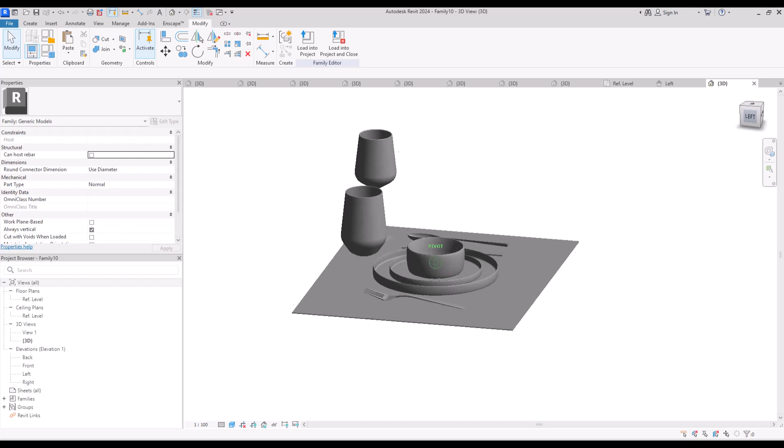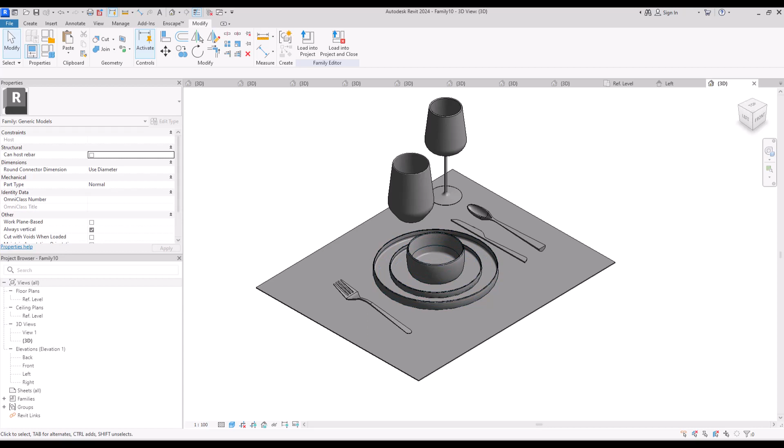I was working on a dining room and needed to set a table for render. I thought it's very simple, so I can share this with you. As I say for all our families, you can model this one time and use it in all your projects. Probably you can set a table like this with 8 or 10 dishes, and of course you can do more. So let's start with number 1.

Go to File and create a new family on Generic Model. First, set your unit, press UN and go to Length part. Change it to meters and put rounding on 2 decimal places. Go to Left View and select Revolve.

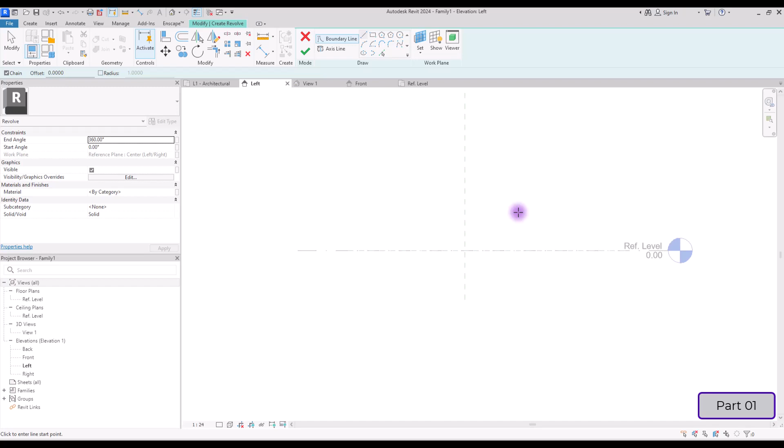In here we are going to model a dinner plate or service plate, which is the largest plate on a table, and it's something around 25 to 30 centimeters in diameter. So I'm going to draw a line here like 30 centimeters and move it to center, like here.

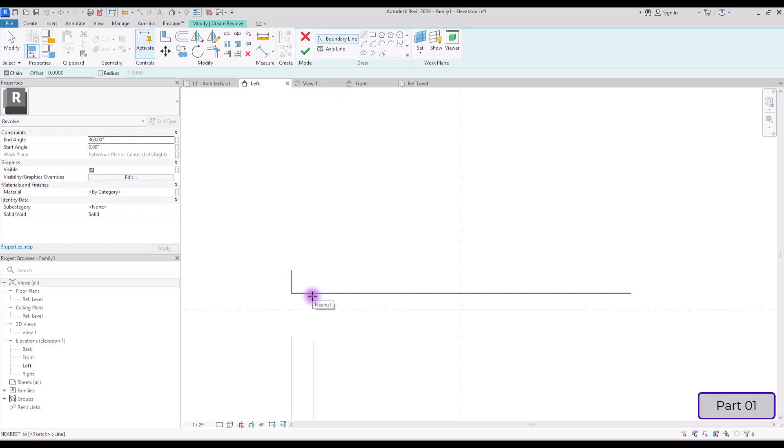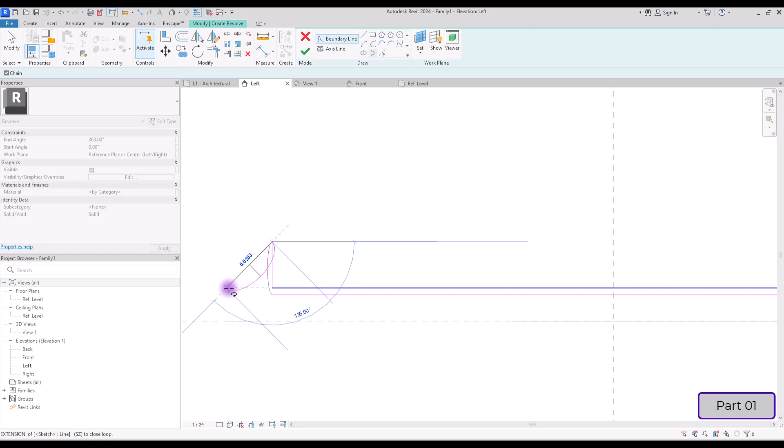I also wanted to have these kind of edges. These kinds of plates are trends these days, so I'm going to use something like this. I'll use a pick line to offset this line for like 3 millimeters to this part, and for attaching this part to here I'll use this partial ellipse, because it gives some kind of curves here. I think it looks good.

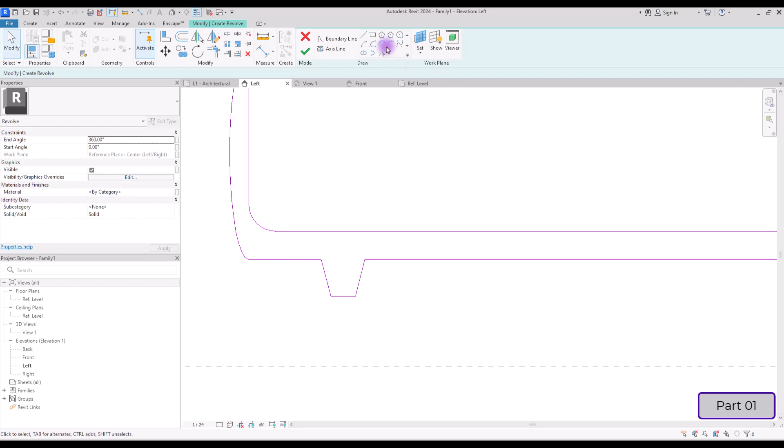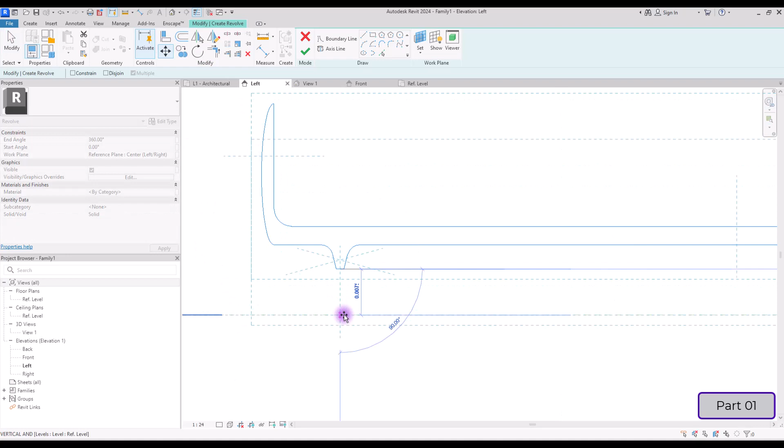Now I'm going to use fillet for this part, and also add some kind of edges to here, something like this, and trim these parts with these lines. I'll also add fillets to this part and this part. I'm going to create a line in this part and trim it with these 2 lines. Now I'll draw its axis to here and move all these lines to this point, to this line here.

Now if I hit finish and go to 3D view, you can see that our plate is ready. It was very simple, right? But let's also make it a bit interesting.

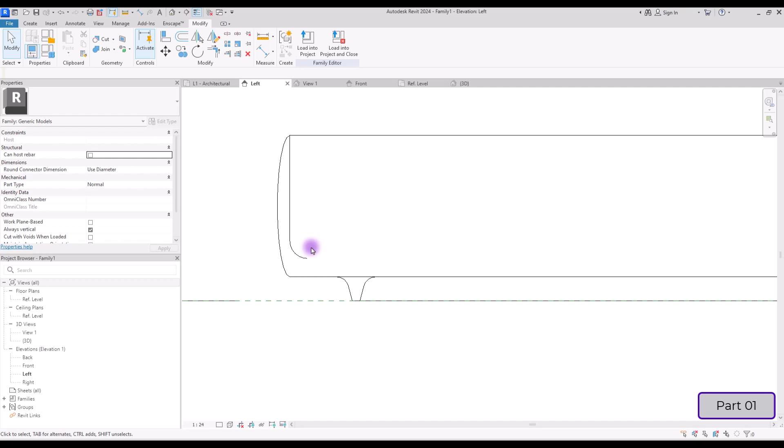I'm going to create another part exactly like this inside of this plate, so I can add another material to it. So go to create and select revolve again.

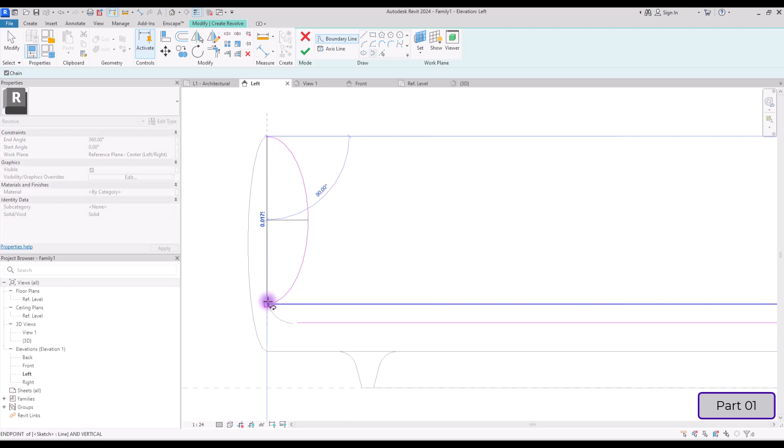Create another line exactly on here with a very small offset, like 2 or even 1 millimeter is enough. I'll move it to this part and use partial ellipse to create something very simple in this part. Now with this split element, I'm going to cut this here and add another line from this point to here.

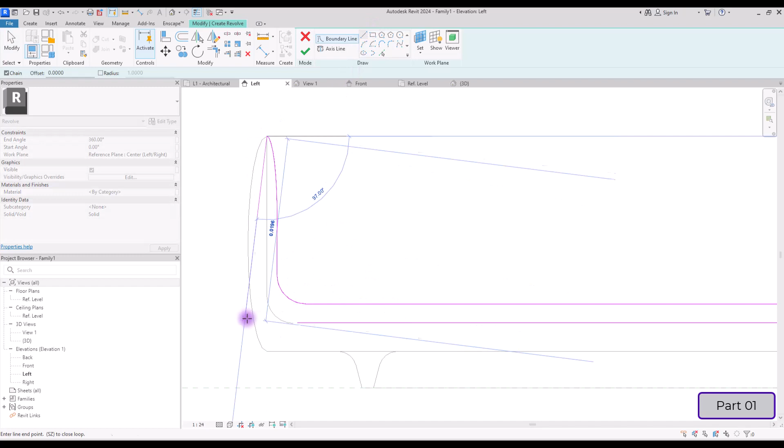Delete this part and trim these 2 parts together, then fillet this part. Draw a line in here and trim these 2 parts together. Don't forget to fillet it.

Actually, because we're not going to use a schedule or something like this, you don't need a very clean and on-edge model, so this is enough. Draw your axis and hit finish.

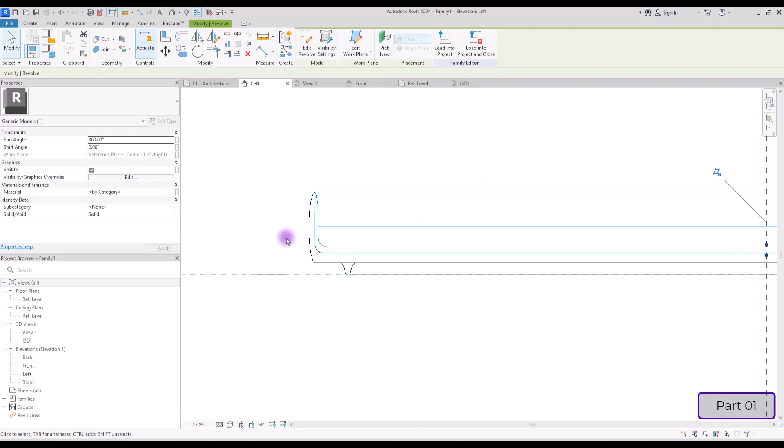Before we look at it again, I'm going to use another revolve for creating a small edge in here. You see plates with a golden edge on top. I'm going to create this part for only that purpose.

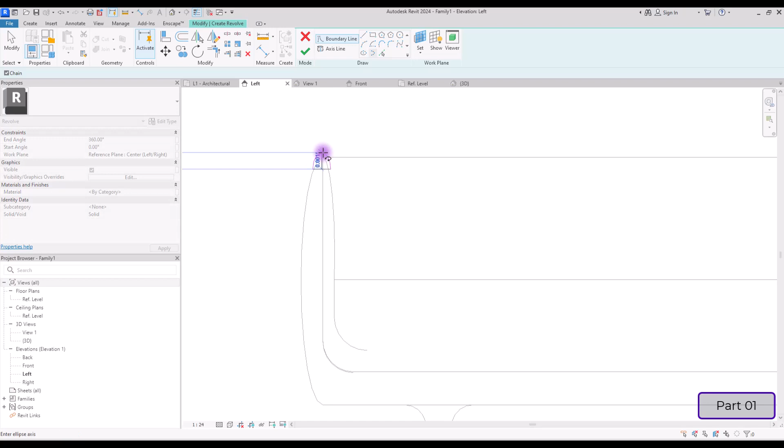I'm going to create a very small shape like a moon in this part, and use this partial ellipse again, closing it with this circle. If you want it to fit more, just use scale to make it smaller like this and move it around to find the best place for it, probably something like this, and hit finish.

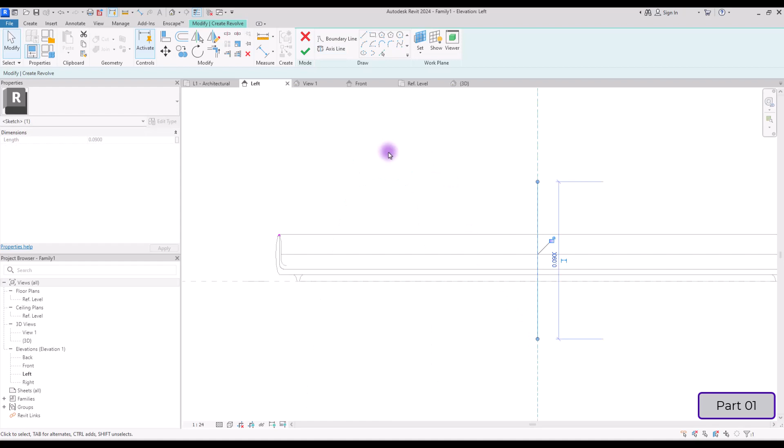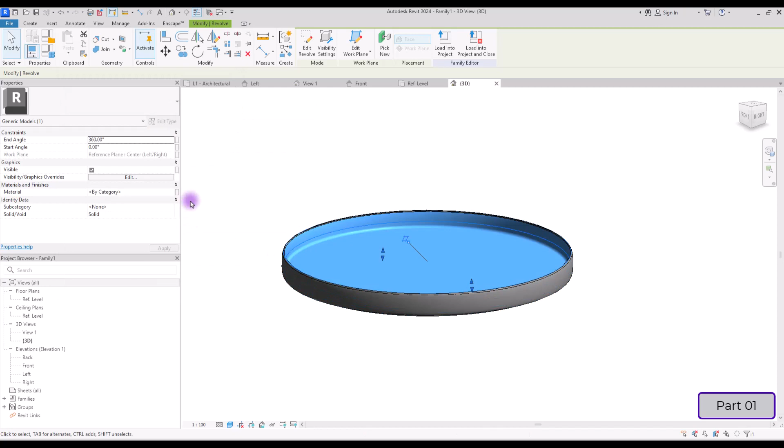Let's go to 3D view. This is our plate, and the only thing we need to do is select different parts and assign material to them. I'm going to name this part bottom, and this inner part should be top. Select this edge too and create a parameter for it, which we'll call edge.

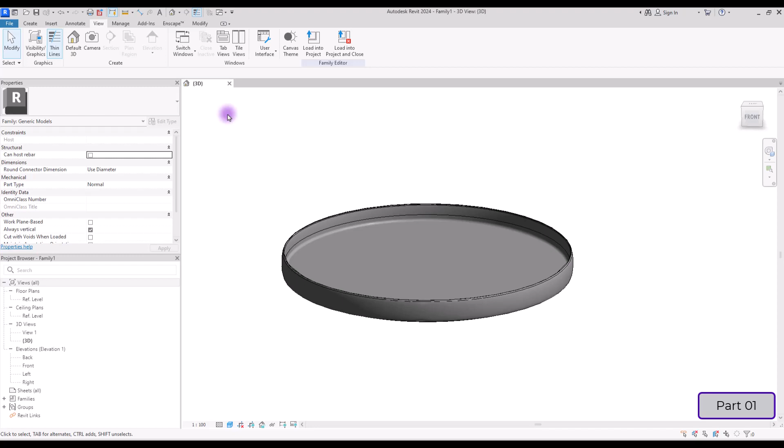We also need a smaller size of this plate, which is going to be like a salad plate or dessert plate. But now you know how you can make a smaller one. So let's move on to the second part.

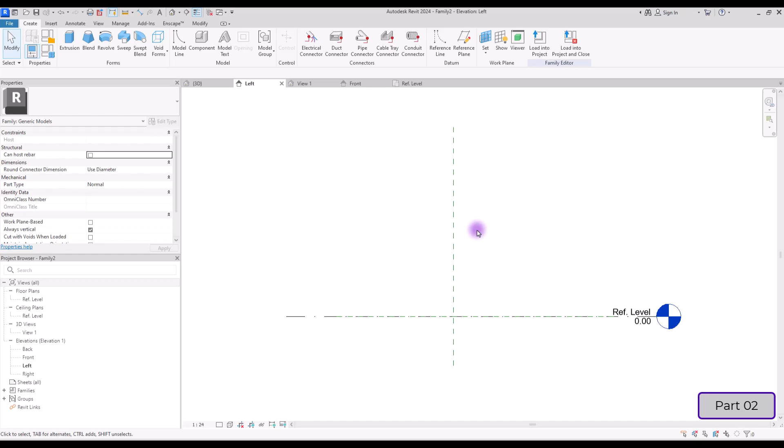Create another family on generic model. Set your unit first and go to the left view. In here we are going to create a bowl, and it's going to be exactly like creating a plate but with different shapes. I told you that a dinner plate is like 30 centimeters; the salad plate or smaller plate should be like 20 or 18 centimeters, and this bowl should be around 12 or even a smaller size.

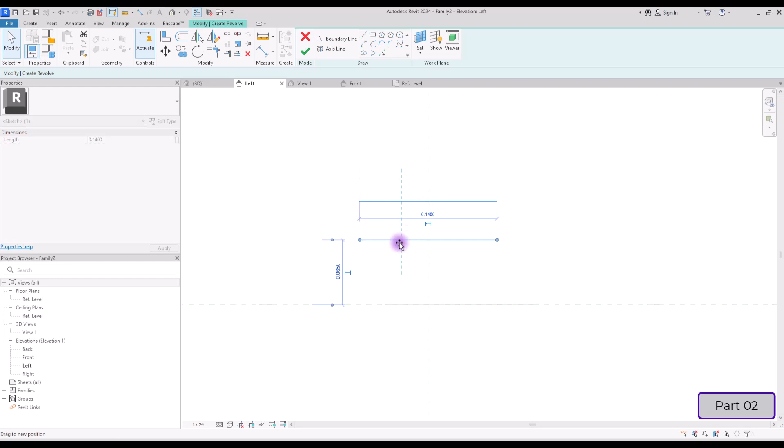So let's go to revolve and create another line here, probably 14 centimeters, and move it to this center. If it's 14 or 12 centimeters, we probably need something like 6 or 8 centimeters for its height. So I'm going to move this down, and like plates, I'll start from this point and draw something like this.

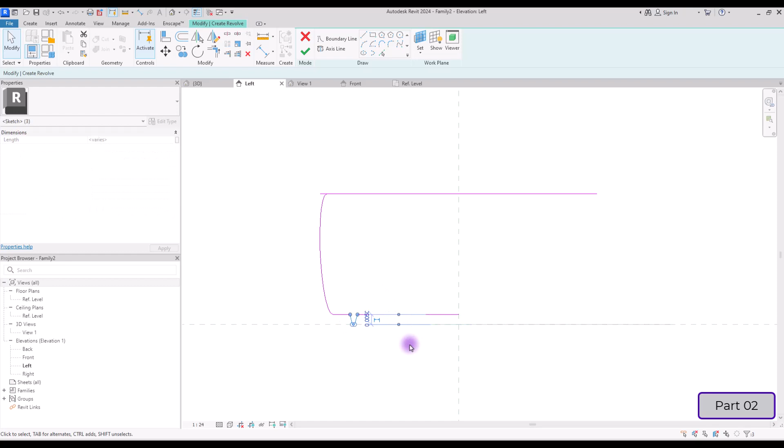Now I'm going to use this ellipse tool and create something like this. I'll move this to here, and now offset it toward the inside for like 3 or 2 millimeters. Draw a line from this point and trim them together.

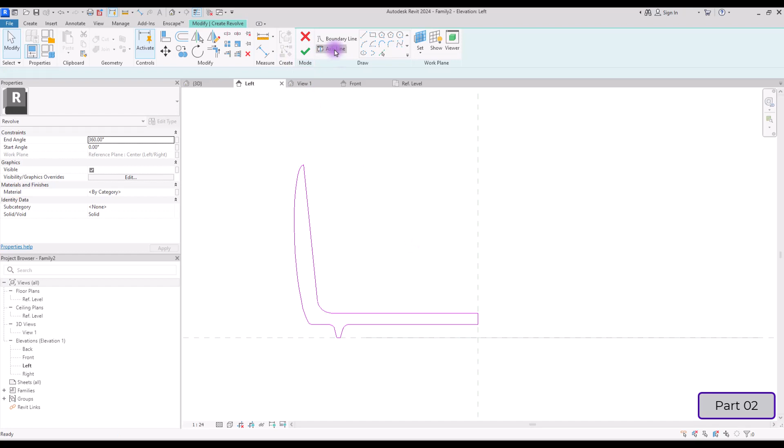Fillet this point and also draw another line in here. Let's delete this line and draw our axis. Now you can hit finish. It's something like this. Now I'm going to model its inner side.

Draw your axis again and hit finish. The last part is its edge.

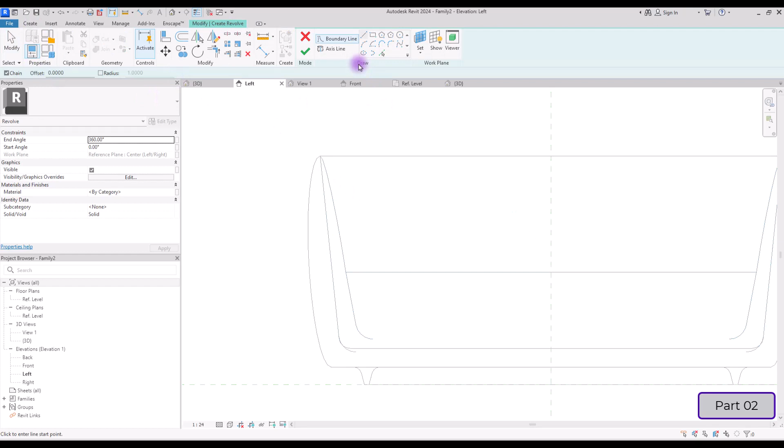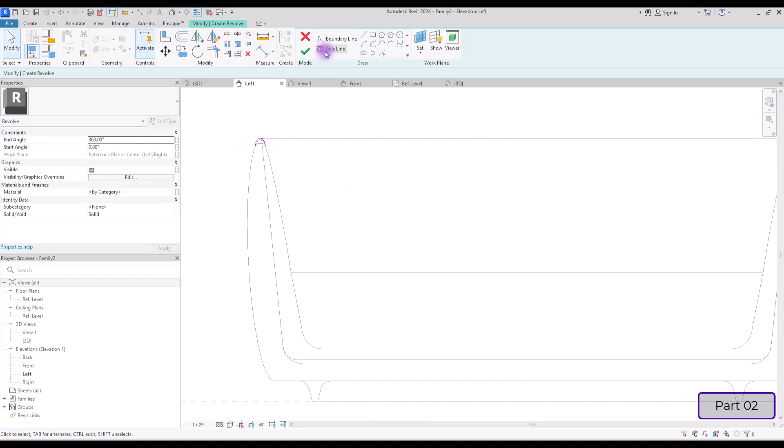Select the revolve again and use this partial ellipse to create some very small shape in this part. Select circle and draw something like this in here. Now if you need, make it smaller or bigger with a scale and move it to a suitable point. Draw its axis and hit finish.

Now the only thing left is assigning parameters for different parts, and you know how to do that. So let's move to the third part.

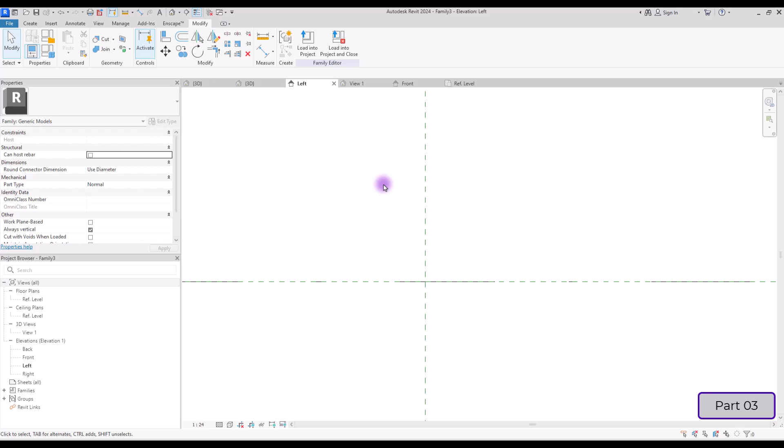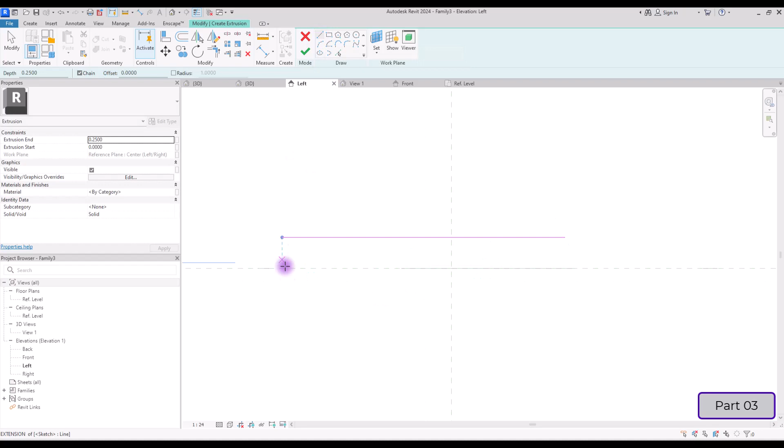Create a new family on generic model and go to left view. In this part, we are going to model a fork, so I'm going to use extrusion. A dinner fork is something between 20 and 25 centimeters, though I've also seen 30 centimeter forks, so I'm going to draw something between them. Let's go with 25. I'm going to draw a line like 25 centimeters, and go with something like this. I don't have any special number for these parts, just draw something like a fork and delete this line.

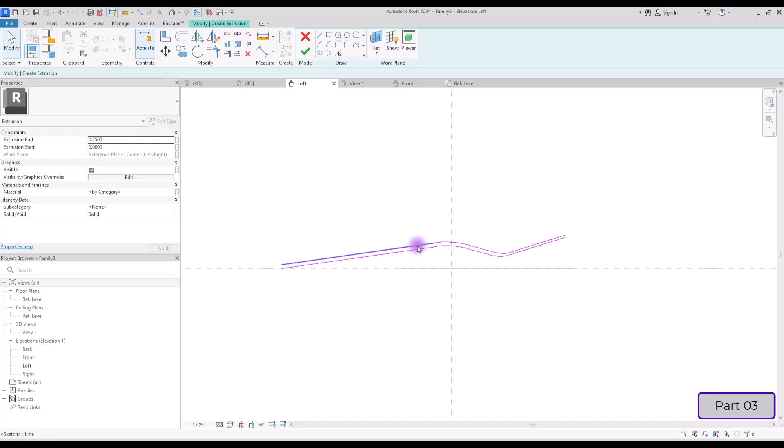Create fillets in this part and also in here. Now use pick line and offset like 2 or 3 millimeters and click on these lines. If you want, you can make some places thicker like this, but keep the overall shape.

Move these two edges closer to each other like this, and I'm going to use this partial ellipse again to close this part and also this part. Now hit finish and go to ref level.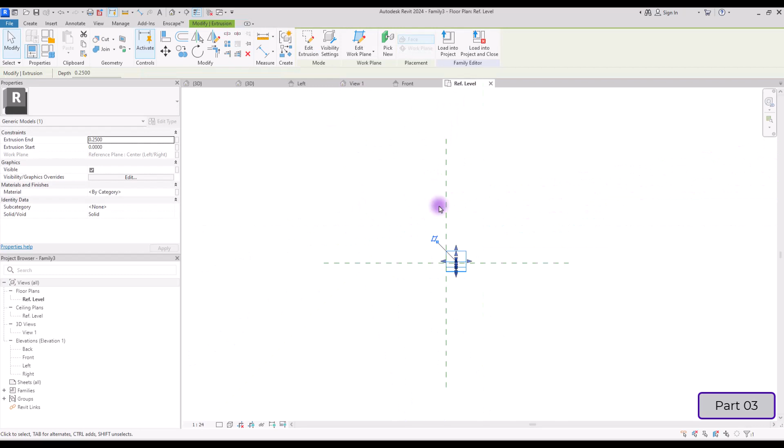Let's put it on center and go to create and use a void extrusion. In here we are going to draw a shape like a fork.

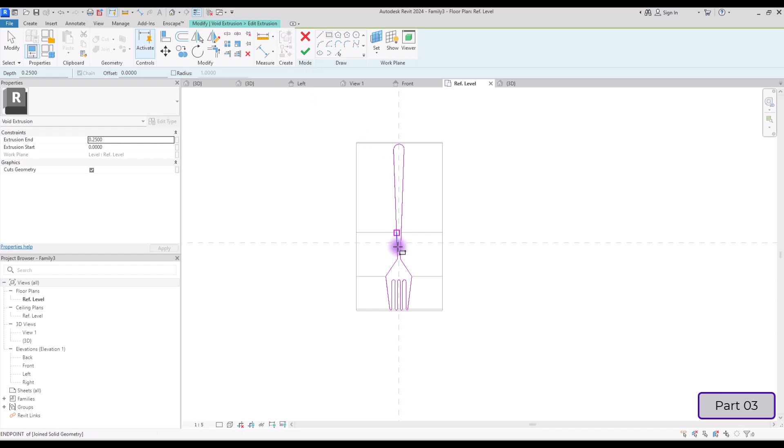If you hit finish now, this part will be deleted from this form. And if you want to make the opposite of this, you need to create a rectangle around this shape. Now hit finish and go to 3D view.

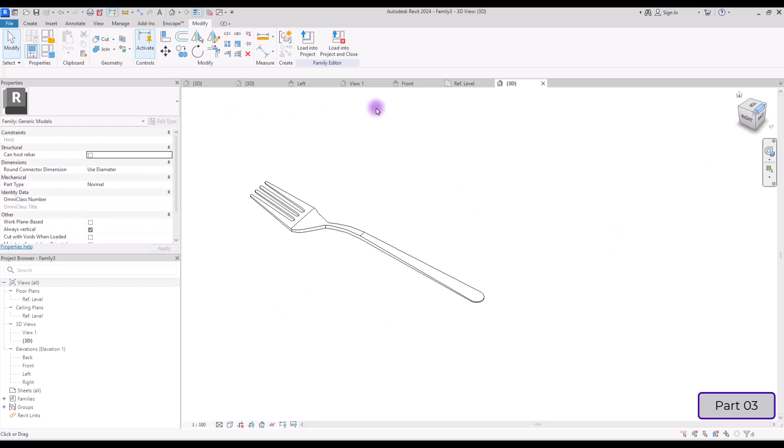In here with cut, first click on this form and then select your void. Assign material to it, save it, and create another family on generic model.

We are going to work on a spoon and we're going to work it on exactly this ref level here. Click on revolve and draw your axis line exactly here.

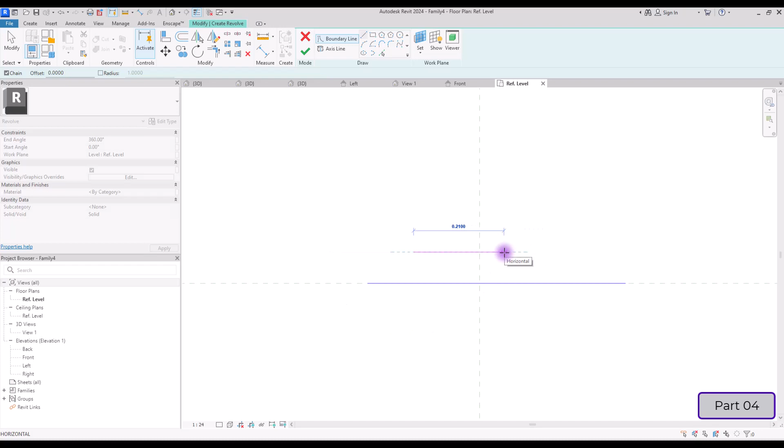Now for a spoon, which size is going to be something like the fork, 15-20 centimeters, I'm going to create a line in here, and then use this partial ellipse to create half of a spoon on this side. Then I'm going to draw a line from this point to here.

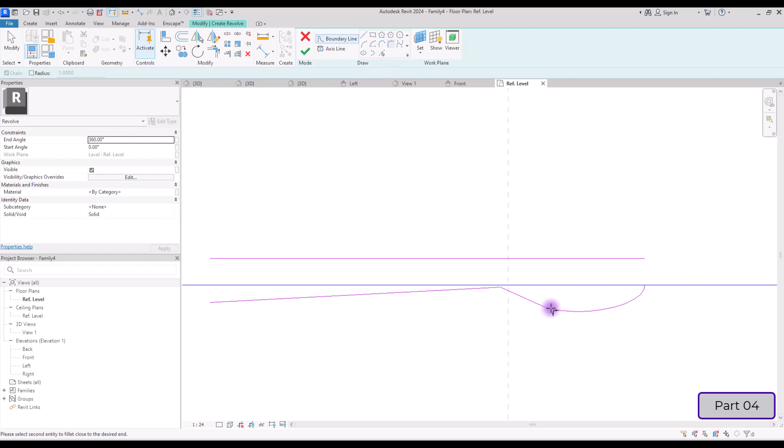Then I'm going to cut this ellipse from this part and create a line between these two parts. Now I'm going to use this fillet for this part. For closing it, I'm going to draw some lines in this part and continue it to this point.

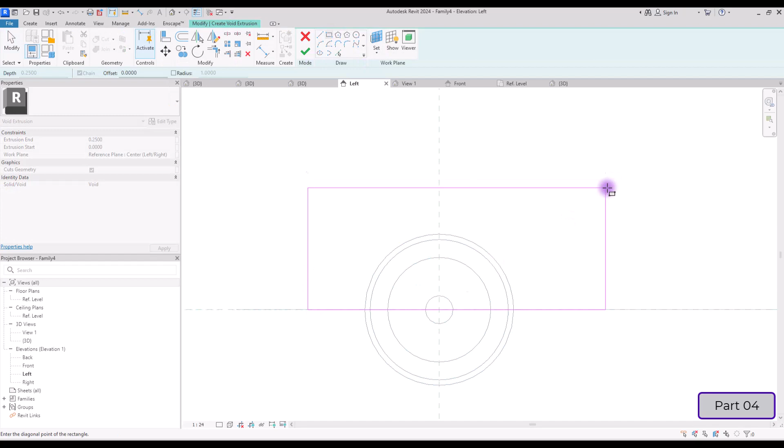Now if you hit finish and go to left view, you can delete this part with a very simple extrusion like this. Go to 3D view and move it to this part.

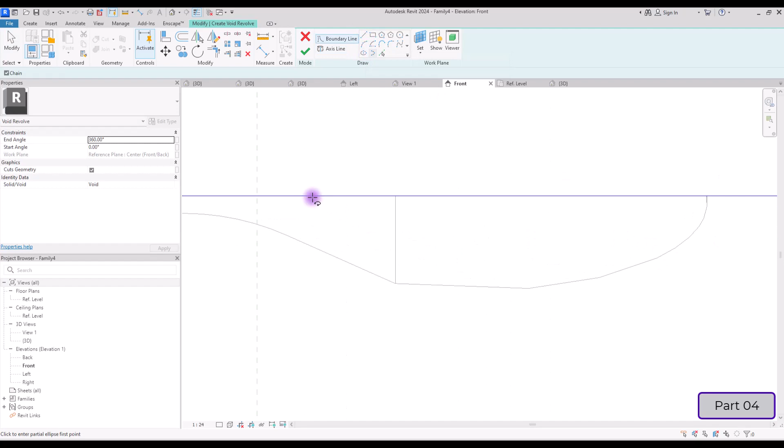If you want this part to be empty, you need to go to front view and create another void, but on revolve. Draw its axis line exactly in here and create a very simple shape like this, and draw another one from this point to here, cut it from this part and trim these two parts. Close this line and now hit finish.

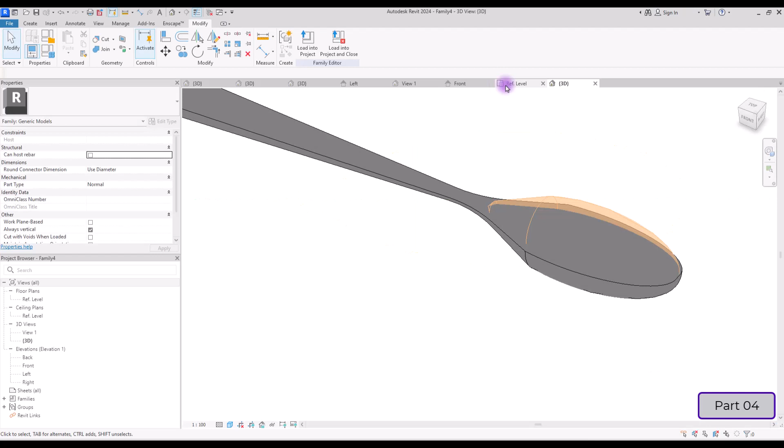Use cut to delete this void from your shape, and this is what we have.

Now you know how to model it, and the only thing left in this part is to play with numbers and shapes until you find the best shape and form for your spoon. Okay, save it and let's move on to part 5.

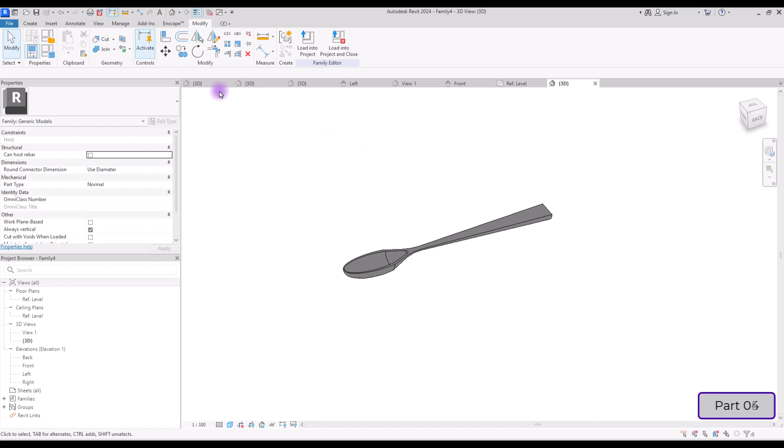Create a new family again on generic model, and here we are going to create a knife. For this we need to go to left view and in here go to create and open a new extrusion. Select line and create a very simple rectangle like this.

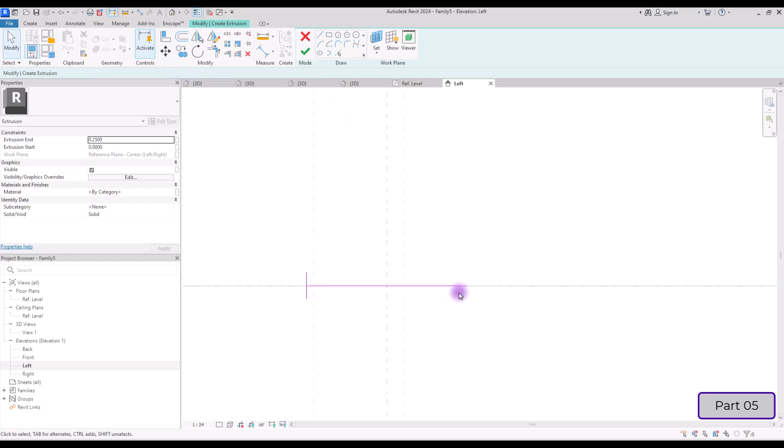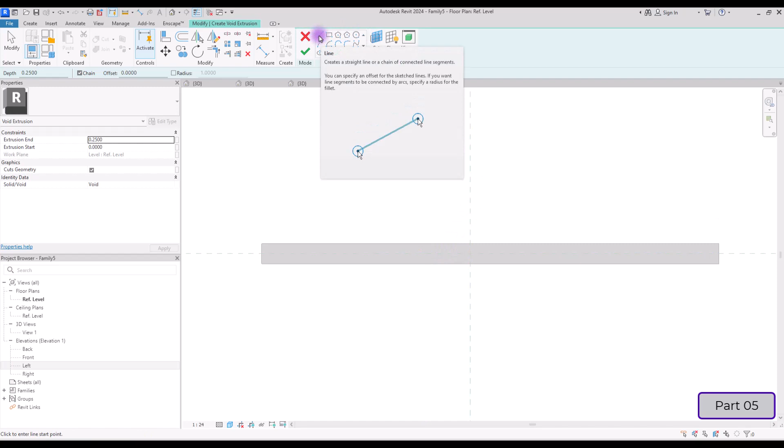Now go to ref level and move it to this part. In here we are going to use this void form extrusion to create a knife exactly like we did for that fork. So first draw a 25 centimeter line and then create a very simple line like these in here.

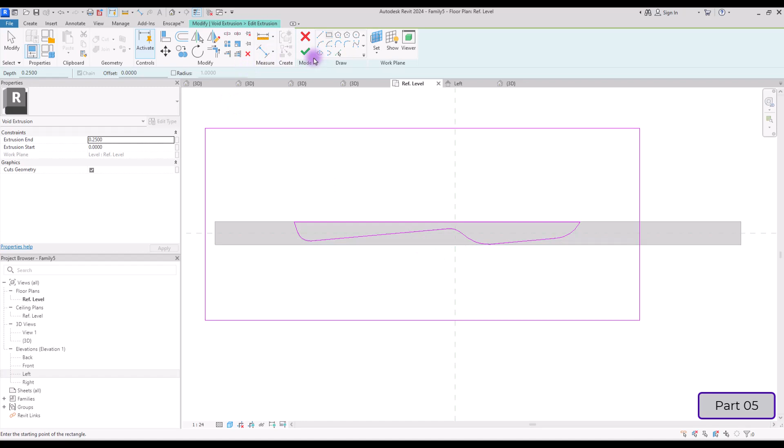Now use fillet for these parts. Now draw another rectangle around your shape and hit finish. Go to 3D view.

And move this void down like this, and also move this part to inside this void. Perfect. Save this one too and let's move on to part 6.

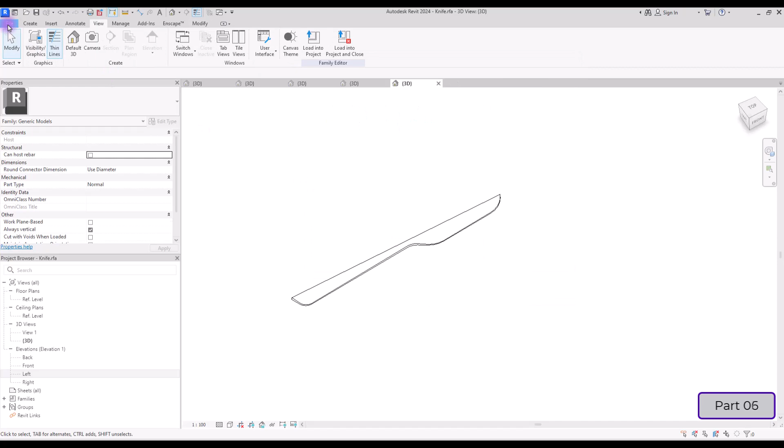Create a new family in generic model. In this part we are going to model a water glass, so go to left view and click on revolve. Draw your axis on this line.

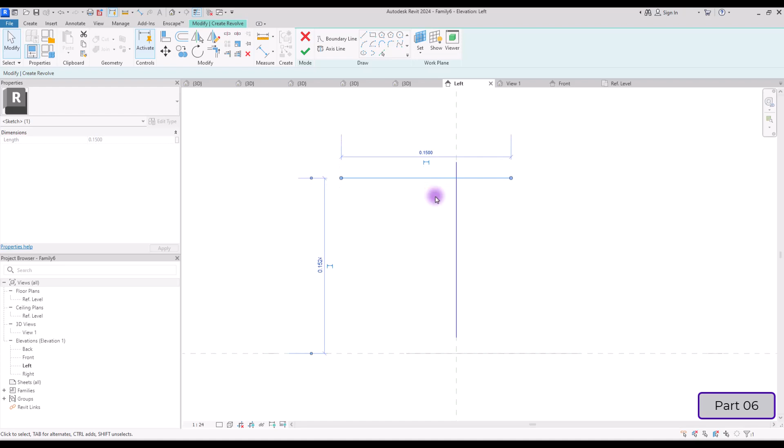I think its height should be something between 12 to 15 centimeters. So draw a line in this part and move it up to like here. Now draw a line from this part to here and then to this part, and just continue it to create a shape that you like.

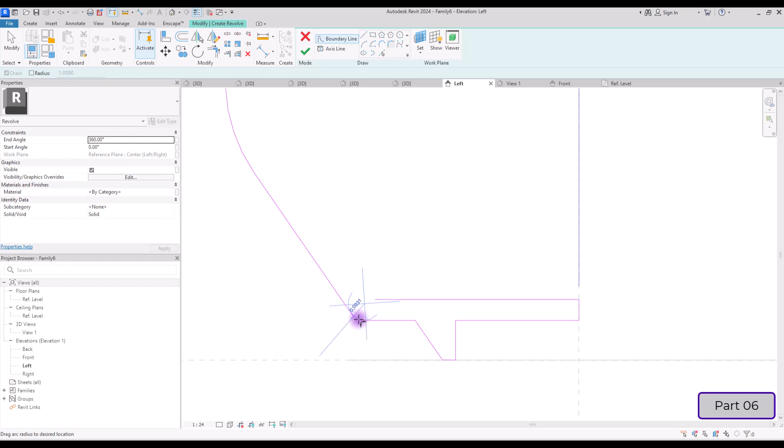Now click on pick line, and with an offset of like 2 to 3 millimeters, create another line here. Then use this circle for this one. Delete this line, and now you can hit finish.

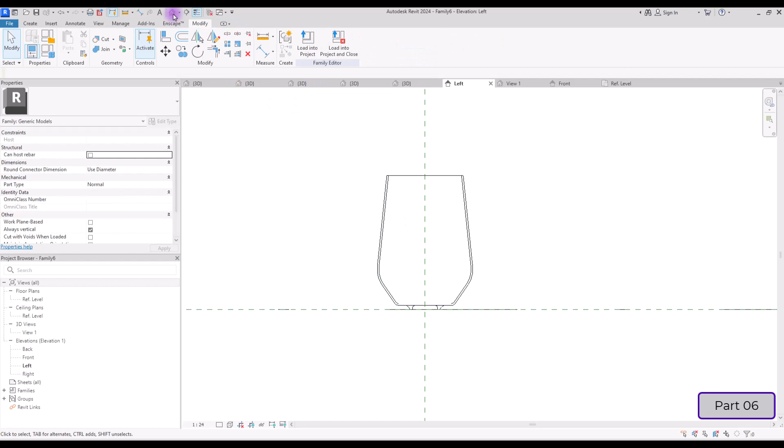Go to 3D view and put it on shaded. Select it and create a new material for it. Let's call it glass. Now let's move on to the next part.

Create a new family again on generic model. For this part, we are going to create a wine glass. Go to left view and use revolve for modeling it.

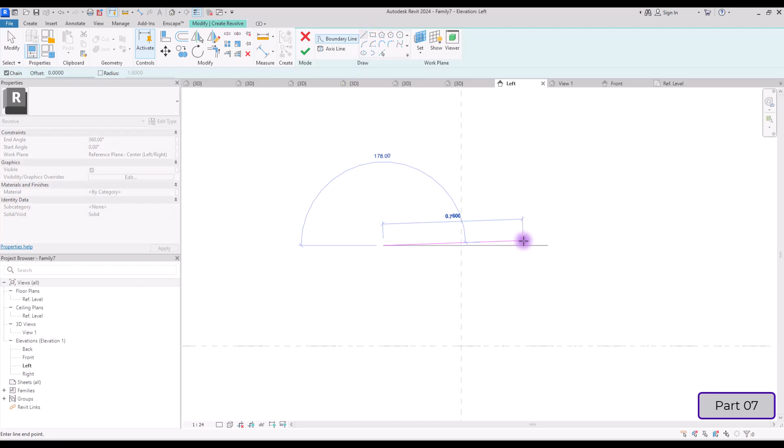Create a line at about 25 centimeters from this reference plane, something like here. Now we are going to set our axis line in this part, and then we are going to draw a wine glass.

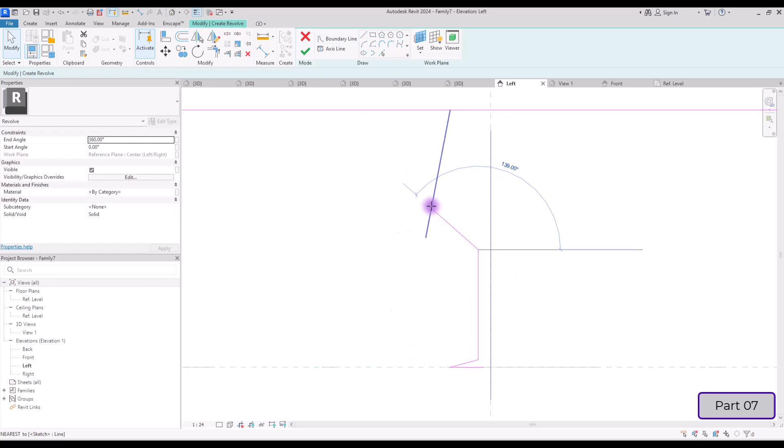Now I'm going to use this circle to close this part too, and then I'm going to delete this line. Fillet these two parts and also this part. Now you can hit finish.

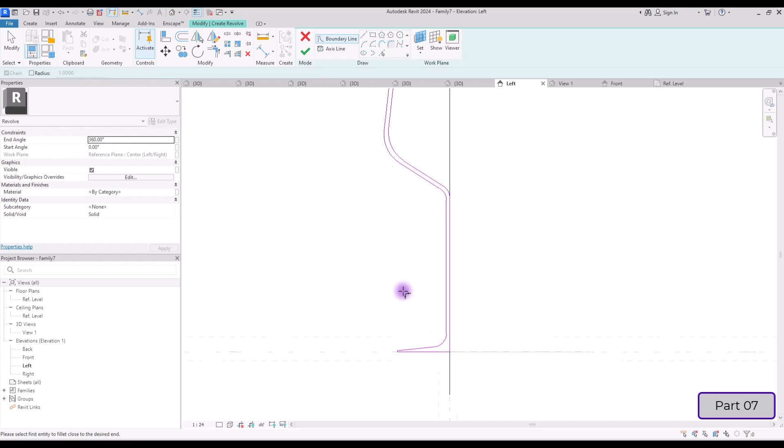For the next part, I wanted to show you how you can model candle holders and some beautiful vases, but I realized you basically use this revolve technique for all of them, and if you can create something like this wine glass, you can create them too. So if you want them, you can just model them yourself.

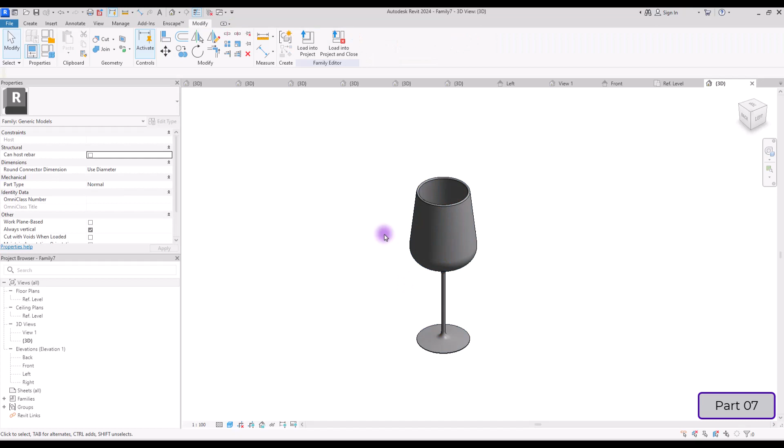Now that we have everything ready, let's create the last generic model. First of all, I'm going to import my dinner plate. Go to its family and load it into your project, and I'm going to put it in the center.

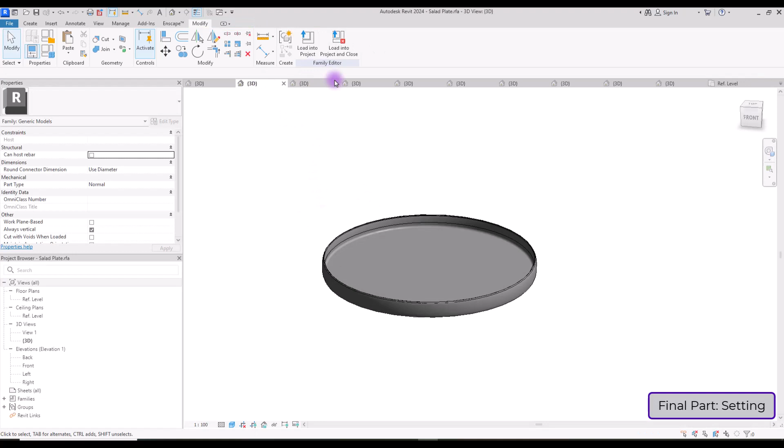Now I'm going to import my salad plate and put it exactly in its center. After that, I'm going to import my bowl, the soup bowl, and again put it in center. Let's go to left view and move them to the right place.

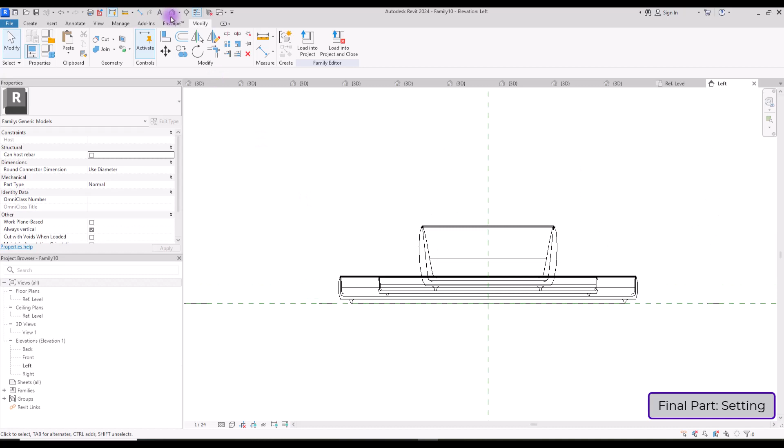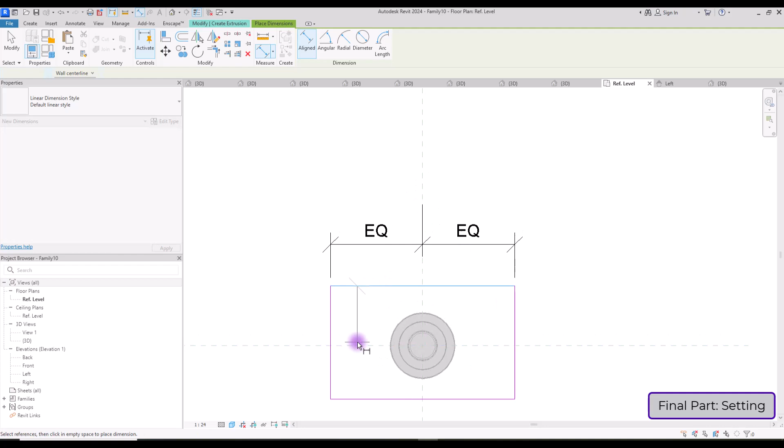I also forgot to create a placement fabric, so I'm going to just create one real quick with extrusion in this part. I'm going to set it in its center here and also for this part, and set it in its center, something like this. Perfect.

I think 3 or 2 millimeters is enough for that. So for this part, let's also move these up like this.

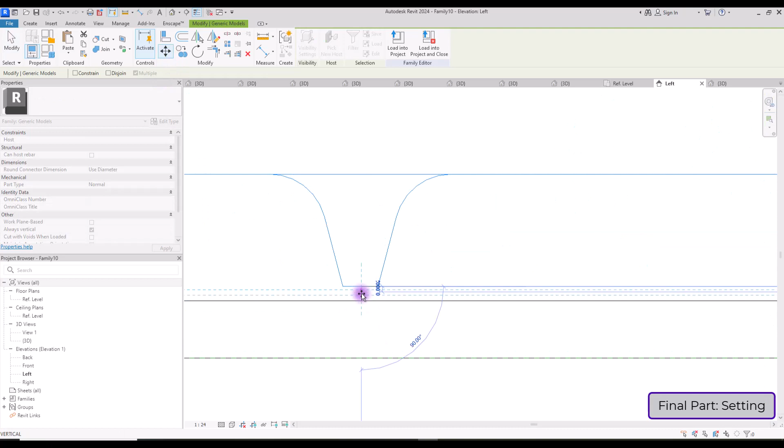Perfect. Now the next thing I need to import is this. So load it and put it in here. Rotate it and put it in here.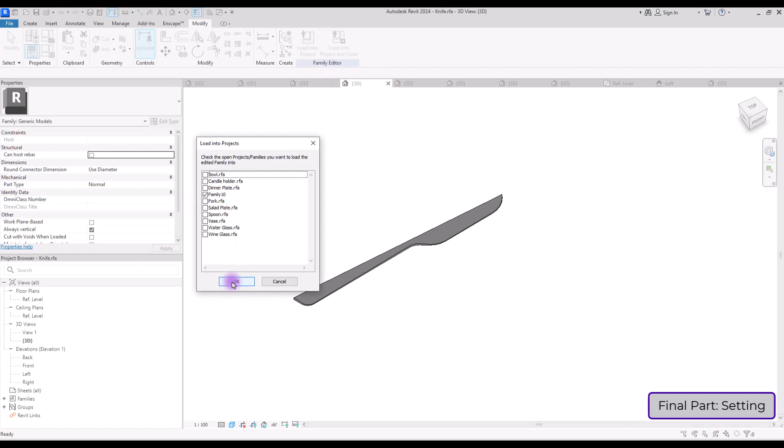Let's load a spoon and knife too, and then we are going to check their placement. Go to left view and move all of them above this fabric.

Now it's time for the water glass and wine glass. I'm going to put it in here, and I will load this wine glass and put it exactly in this part.

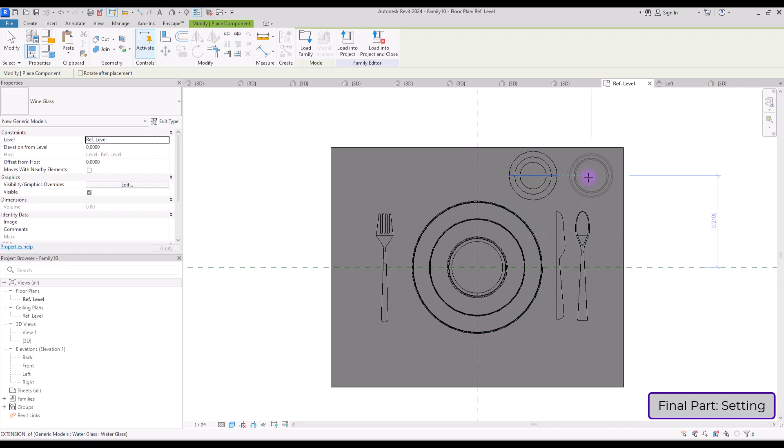However, you can use all of these parts separately. This family is going to be our final family, and when we want to use this set, we can load only this family. For this, we need to import all of those materials to this one, and we need to assign them again.

How can you do this? You just need to select your object, and if you go to its edit type, you need to click on this part and create a new parameter for this bottom, and another one for this edge, and also for this top part. Now that you did this, if you go to this family types, you will have all of them here.

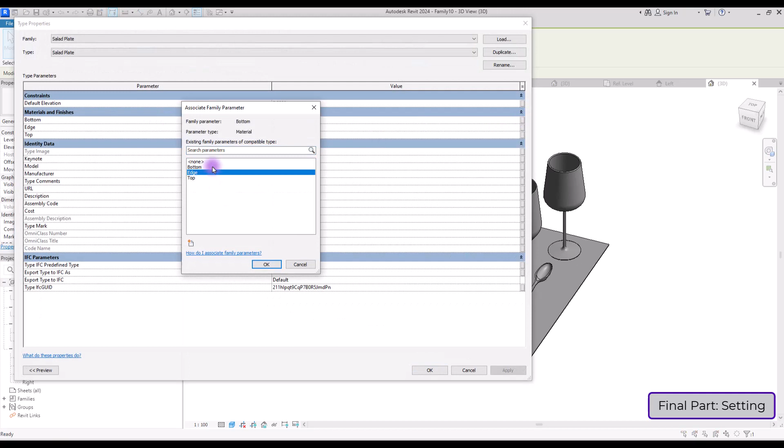Also, if you click on this part, which is a salad plate, and go to its edit type, you can just simply click on this part and select this bottom for it. So if you change one of those materials, all of these materials on your dishes will change.

You need to repeat all of these parts for each part. If you go to this family type, you can change all of these materials and use them the way you want. So this is our set, and however, we can do lots of things about this.

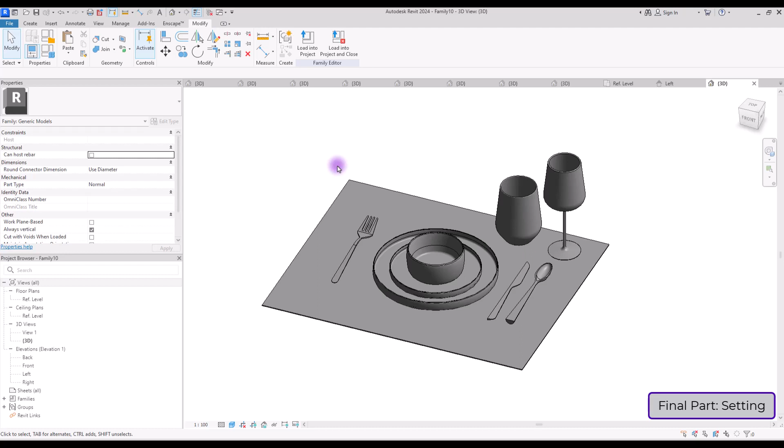I like this set a lot, and I think with adding material and different texture to these parts, we can make it much better.